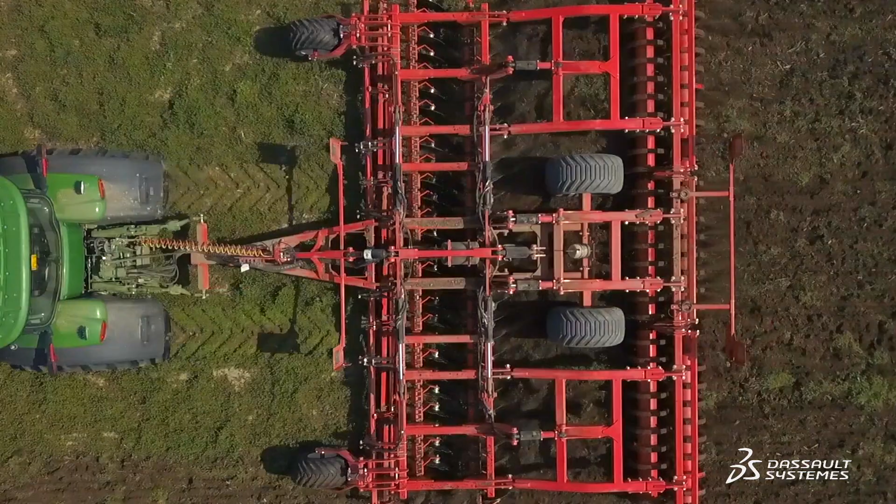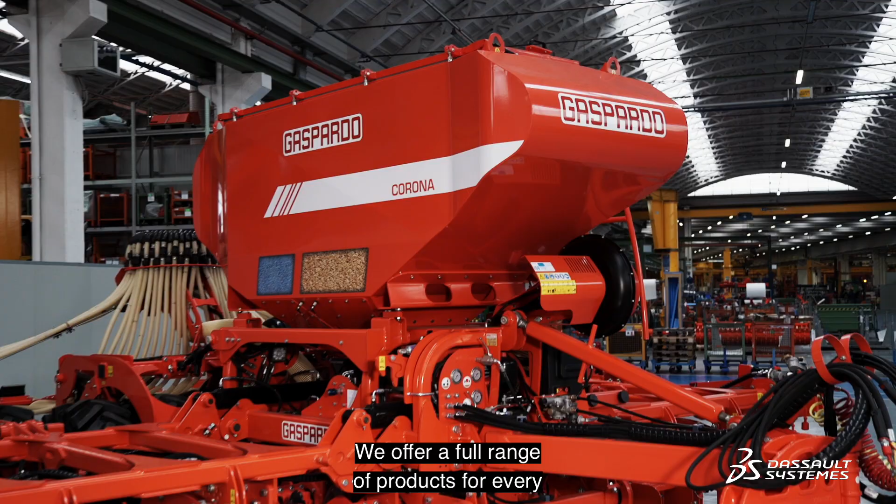Maschio Gaspardo started as a pioneer in the field of tillage solutions, and offers a full range of products for every farmer's needs.

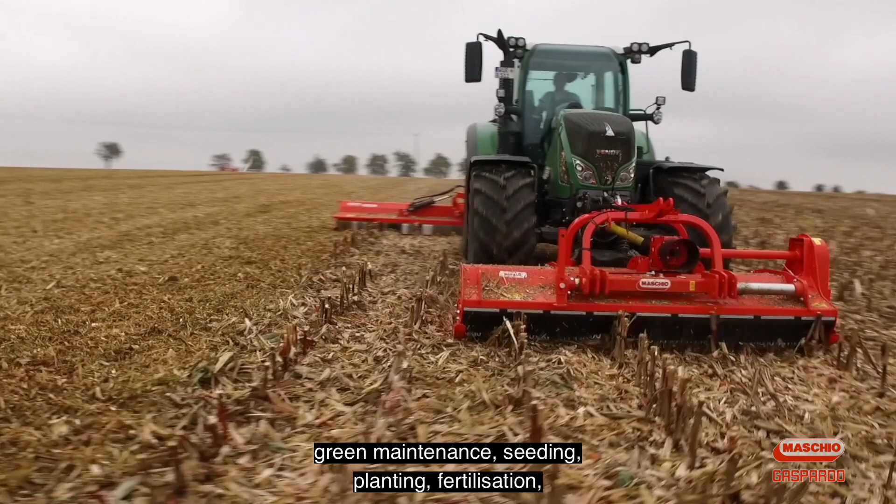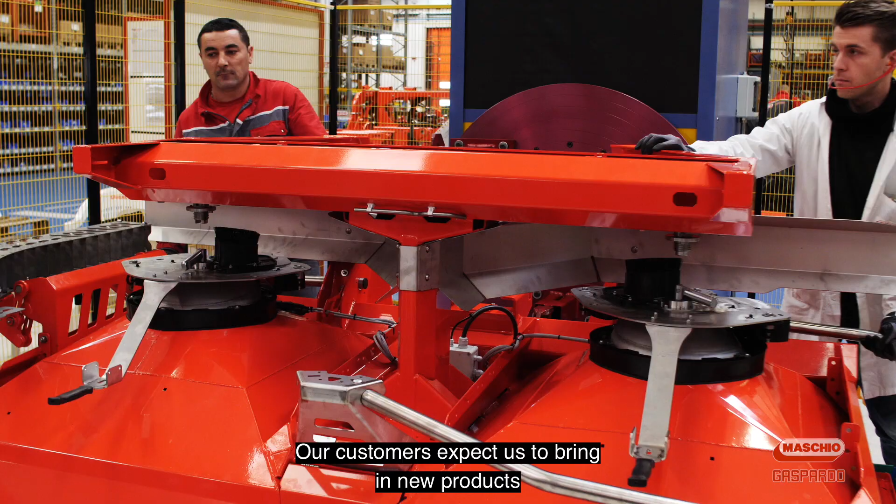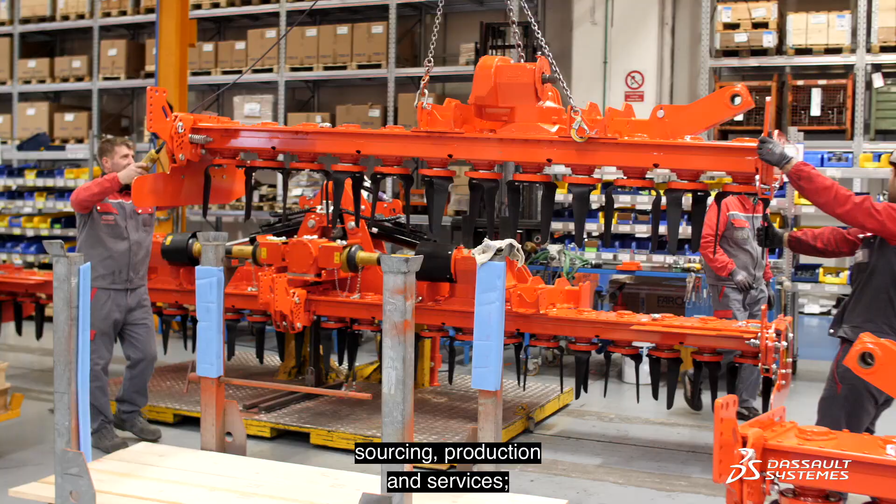Our company provides solutions for tillage, green maintenance, seeding, planting, fertilization, crop protection, and haymaking. The demand for customized products and services is increasing. Our customers expect us to bring new products and innovations to market faster without compromising on quality. To meet these challenges, we need to transform our business, improving collaboration among design, sourcing, production, and services.

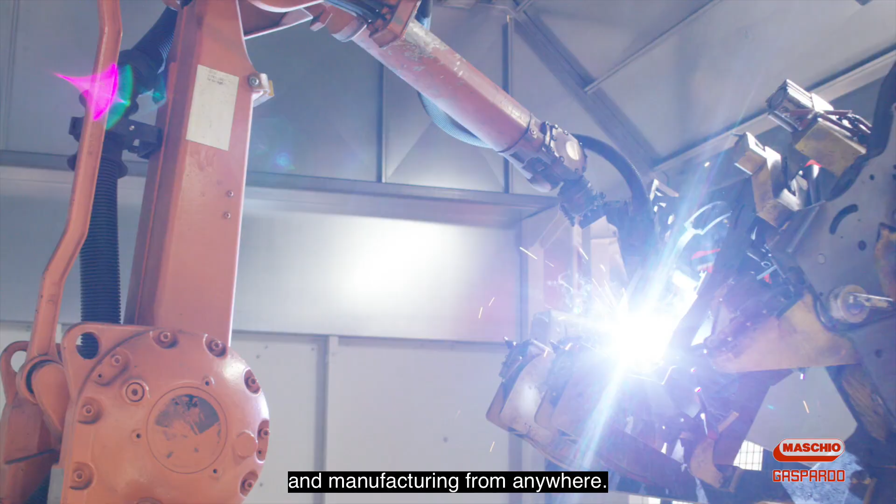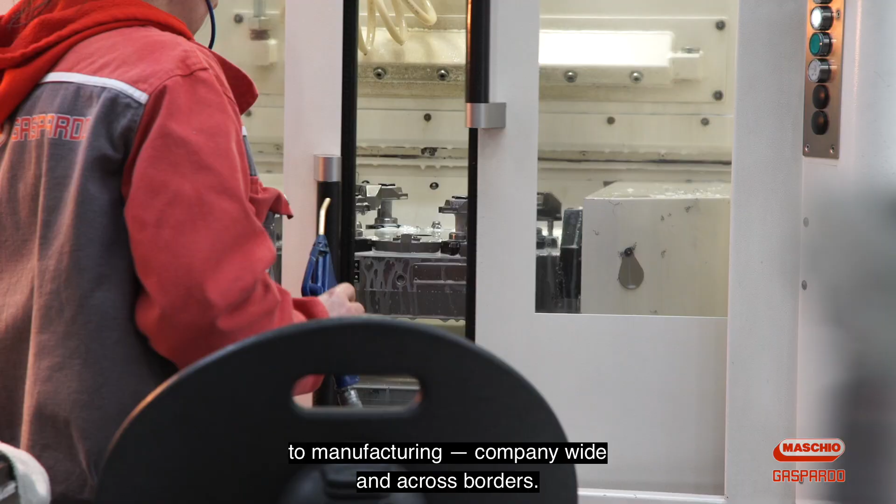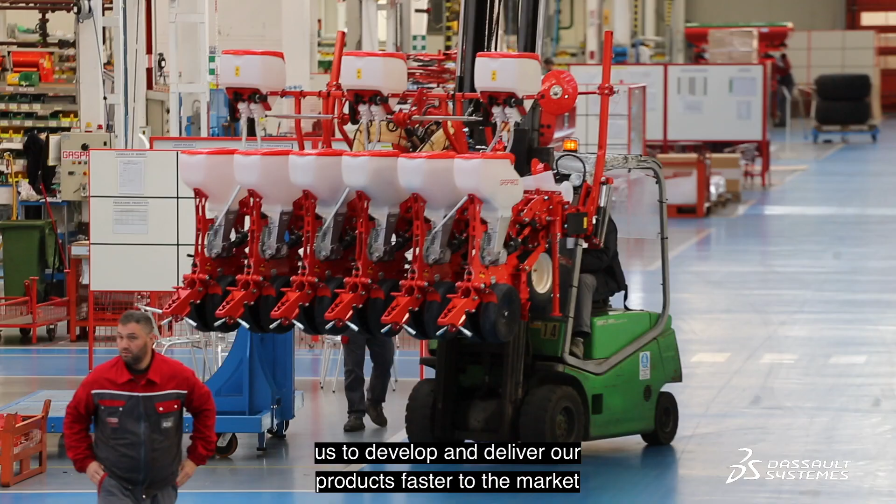The 3DEXPERIENCE platform helps us synchronize and align our processes from design and engineering to manufacturing, company-wide and across borders. The ability to create a digital twin in the platform drastically reduces waste and costs. In addition, modularization capabilities help us develop and deliver our products faster to the market without compromising quality.

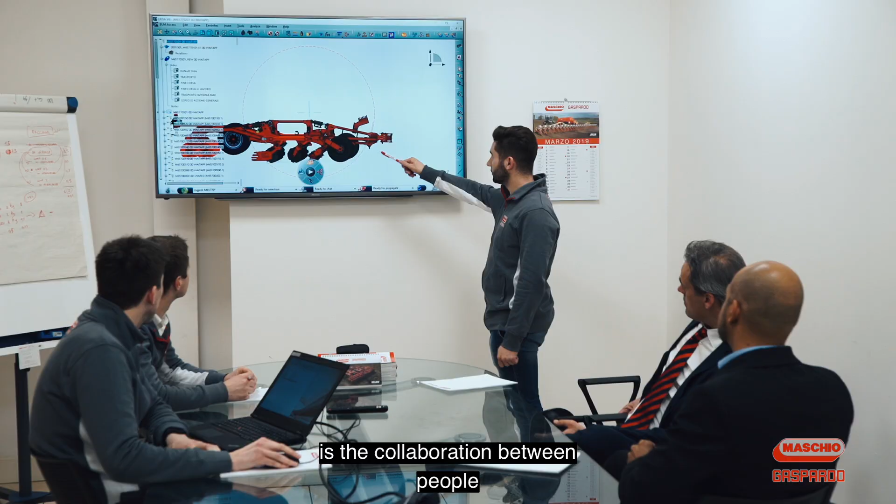The Dassault Systèmes business platform allows data sharing and worldwide control of our product development processes. Another advantage possible today is collaboration between people located in different areas. Feedback from engineers today is positive, because they are able to share experience and increase their competence. This gives us a huge advantage to further improve our competitiveness and technology leadership with products for sustainable farming in the future.

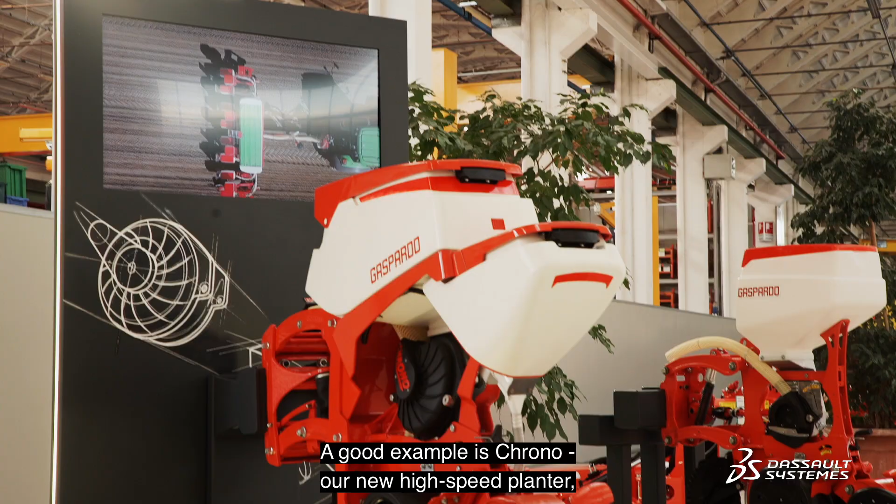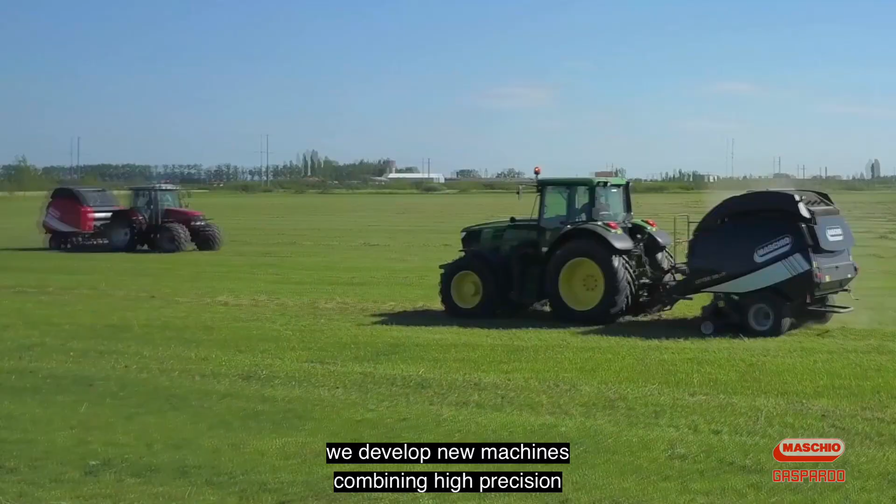A good example is Chrono, our all-new high-speed planter, which doubles productivity and increases the accuracy of seed delivery and spacing, while making the planting operation easier than ever. With our expertise and innovative spirit, we develop new machines combining high precision and speed to help farmers increase their efficiency.